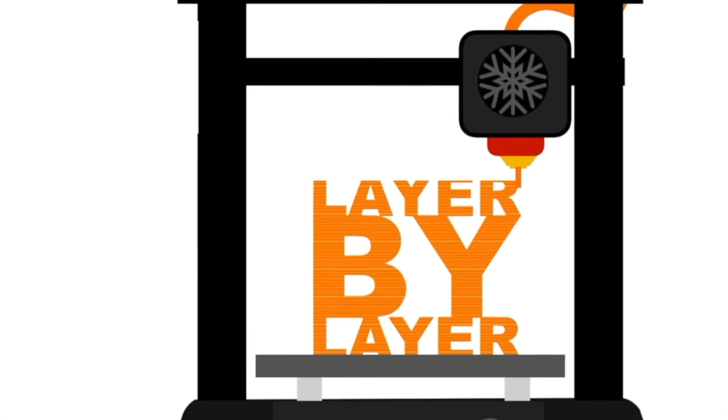Today I'm going to use Sketchup to show you how to make a 3D printed file that is in multicolors.

I'm going to open up the Sketchup application, which has multiple different templates. There's a template for 3D printing in millimeters, and one for inches. I like the one in inches, but it's not for my print bed, so I increased the scale and made my own, which I only use for my bigger models. My favorite template to work with is the simple inches and feet.

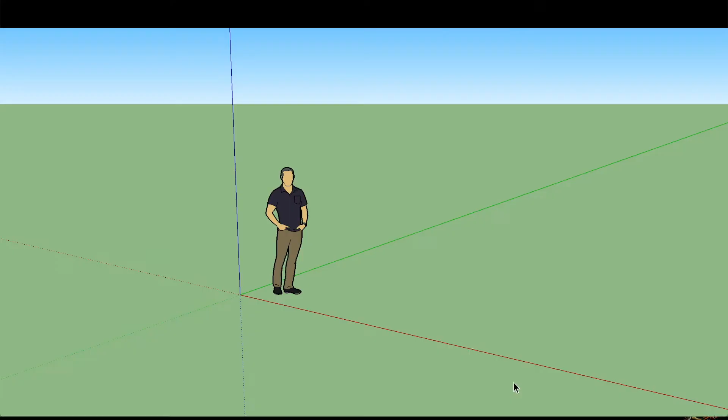Once it loads, I take the orbit tool and rotate it around so I can see my build surface, and then I take the eraser and erase the built-in guy.

To start this, you want to go to File and then Import, and select the image you want to use. I'm using my logo, and you want to make sure you have all supported image types selected.

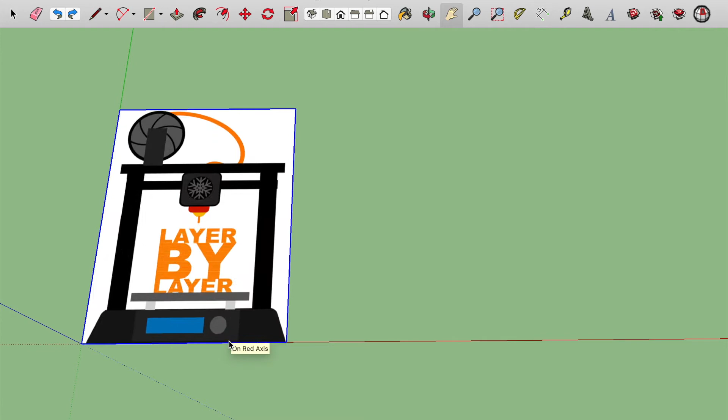Once the image loads in, I like to place it on the center point. It's going to make you select the size by sliding your cursor, and in the bottom corner it shows you the size of the image. But the easier way to do this is to type in the number you want it to be, making sure you have the correct measuring symbol.

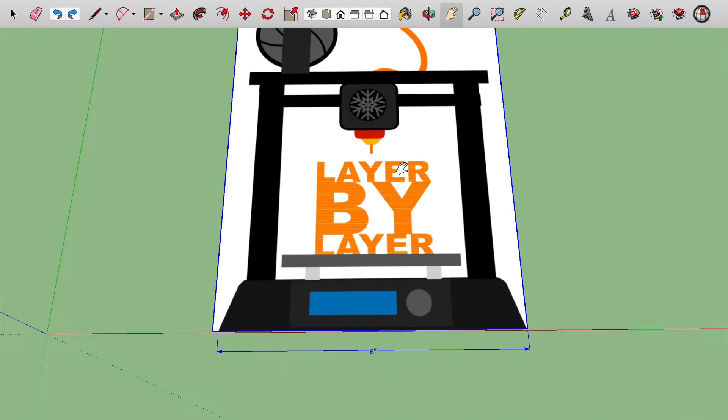I didn't realize it didn't crop my picture right, so I had to manually increase the image. Now I'm going to trace every line and object in this model.

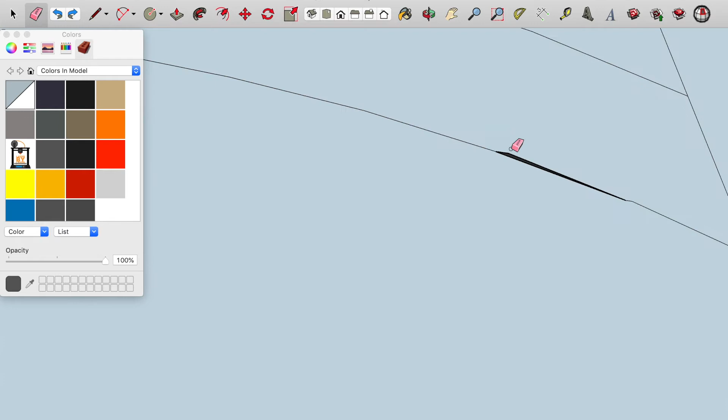I made my animation and logo in Mac Keynote, and I used a shutter to get the spool look I was going for. I didn't like how the shutter was coming out, so I redrew it to look more like my logo. I was unhappy with how the shape was coming out and how ununiform the spool was looking.

So I copied the curved shape and then rotated it until I got the shape I was looking for. Once I had the base shape, I copied the whole thing over and over again to make a full circle.

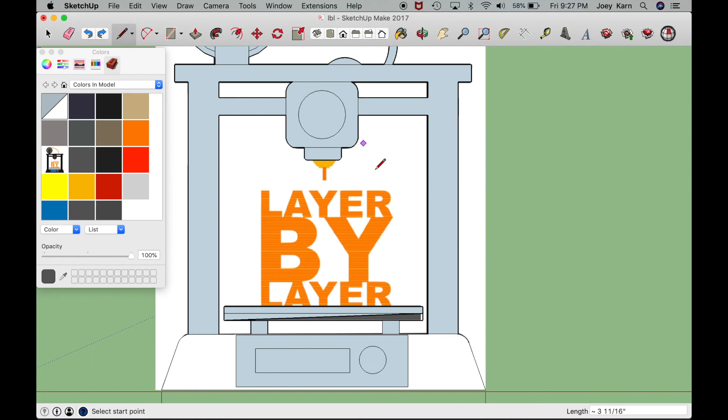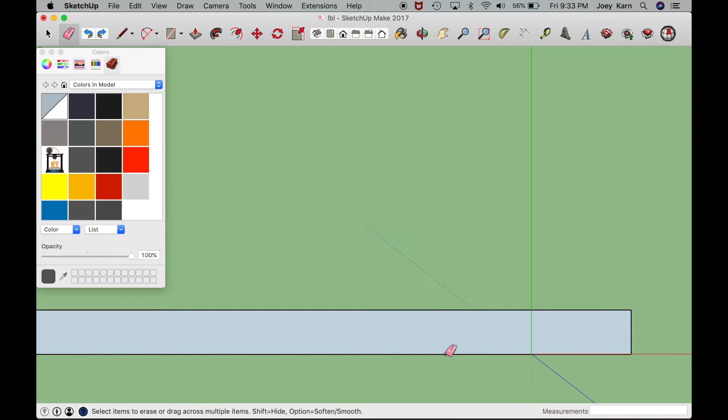It wouldn't let the rectangle for the print bed be solid, so I copied it, pasted it, filled in those lines, erased the other lines, and copied it and pasted it back in, then removed the lines that were there.

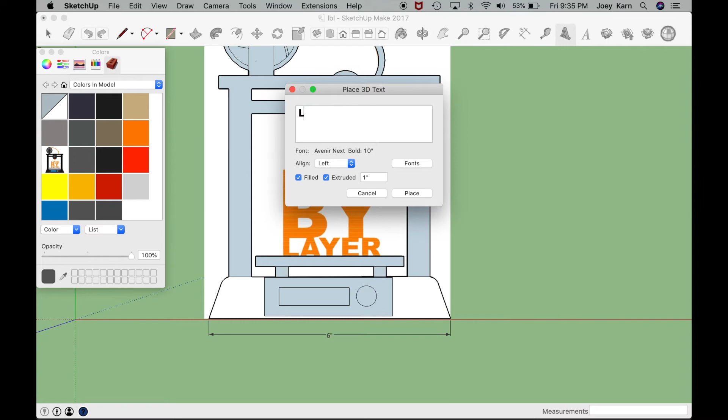Next, I wanted to add the words layer by layer. There's a tool I use, the 3D text tool, and I typed in the word 'layer,' making sure I had the correct font and in bold.

I had to do it one by one to get the exact look I was going for. The height of the layers doesn't matter right now because I will fix that later.

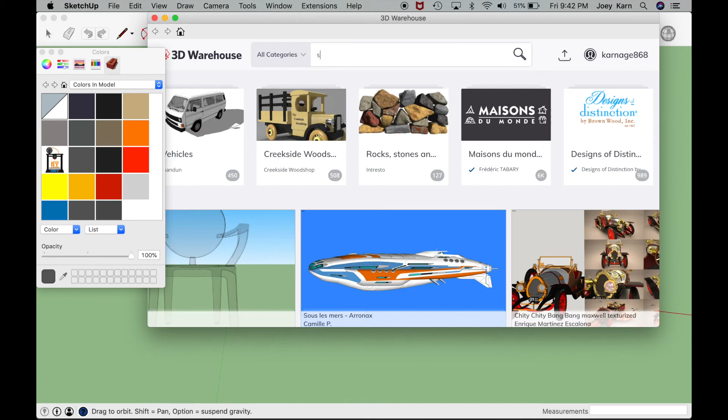When I designed my logo, I used a snowflake as a fan cover, so to make it easier on myself, I decided to use the SketchUp 3D Warehouse to download a snowflake file to use as the fan cover. Once I found the one I was looking for, I scaled it down to the size of the circle to fit it in, and again, the height doesn't matter, I will adjust that later.

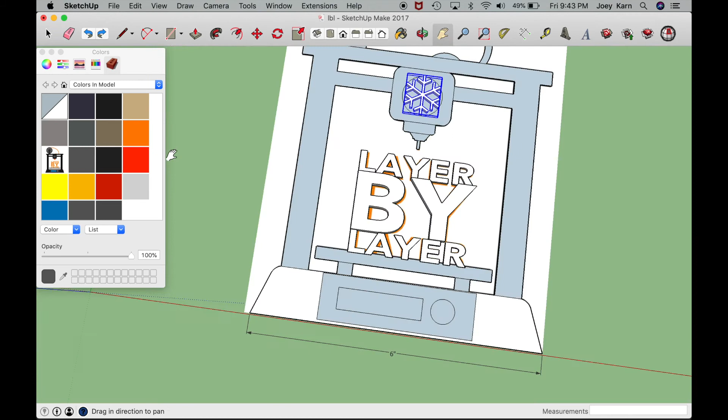Now I took the color grab tool and copied all the colors of each shape that I want to be at a different height. To get a multicolored print with a single hot end extruder, I used the push-pull tool to bring each color to a different layer.

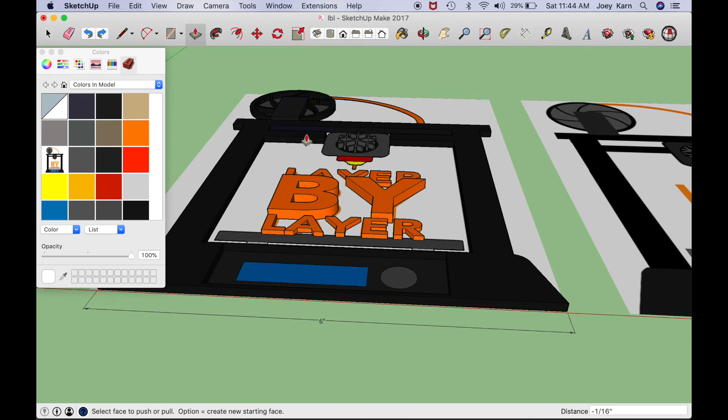Orange at a 16th of an inch, yellow at an 8th of an inch, red at 5/16 of an inch, black at 3/16 of an inch. Then I wanted the spool design to be 7/32.

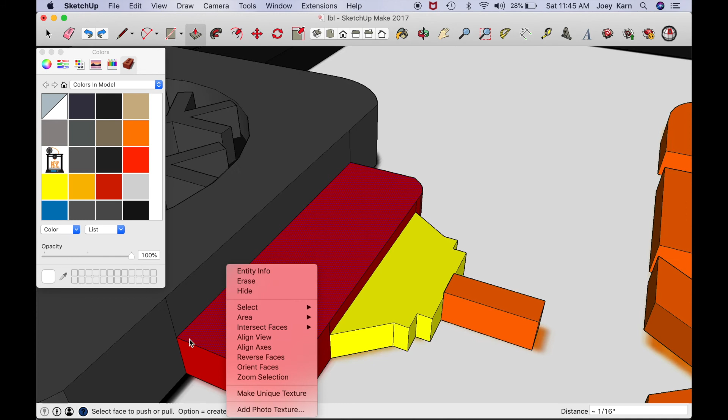Then I extruded the spool holder, printhead cover, and the rectangle underneath the LCD screen. Next I extruded the LCD screen at 11/32 and then gray again at 3/8 of an inch.

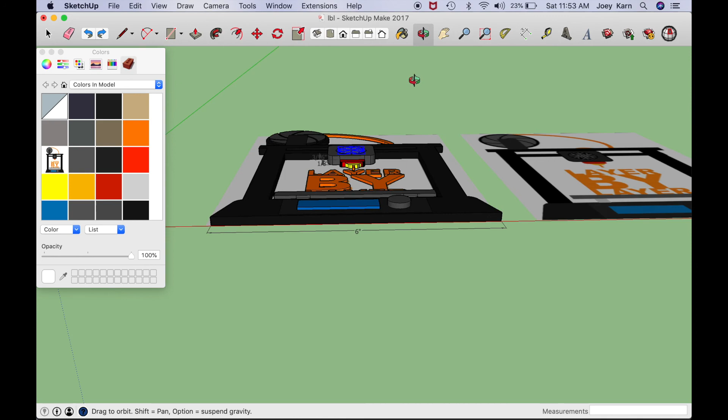I then used the scale tool to scale the letters to 1/16 of an inch. I then deleted the image and turned the model over to make sure that all the surfaces were solid.

I then used one of the best free plugins that SketchUp has to offer, called Make Solid. It makes sure that the model you're making is solid, so when you go to print it, it will be an actual 3D printable file.

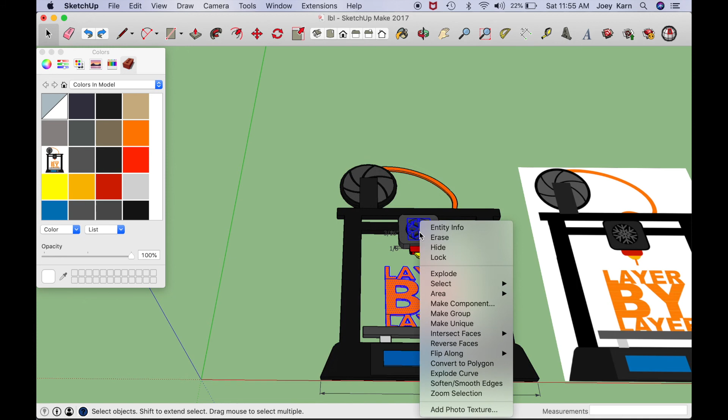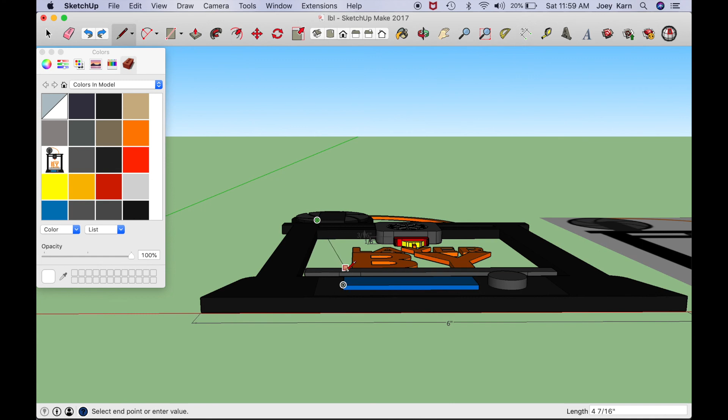But for some reason when I did this, it removed the Y-E-R and the Y in layer by layer. I don't know why. I undid everything until I got it back, then redid it, making sure not to remove the Y-E-R and the Y.

Now that we're all done, we're going to save the model as an STL file. This is my second favorite plugin. To use it, you go to File, then Export to STL, and save it as an STL file.